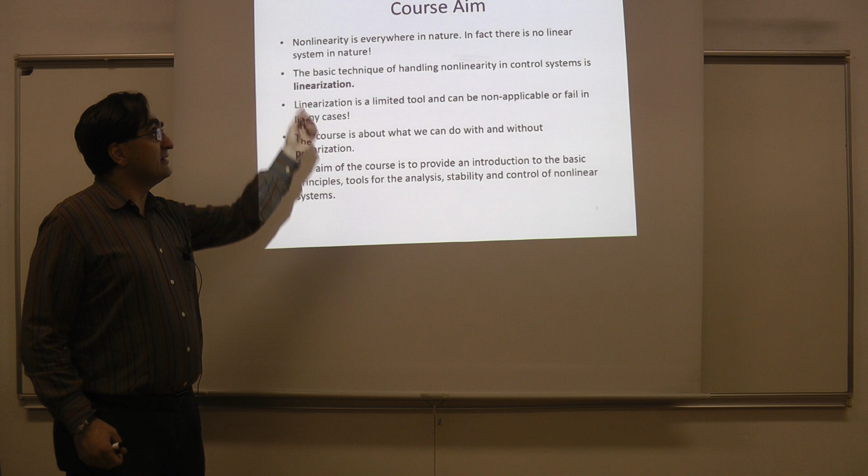So linearity is an idealization. It is not a natural phenomenon, actually, and you lose it quite easily by going outside the operating region of your components. So nonlinearity is the main thing that we observe in nature, not linearity. Linearity is only constrained to a small region. So there are no linear systems in nature. All systems are nonlinear, and that is why studying nonlinear systems is important for a person working on control theory.

So when you try to apply your linear control tools, you have to be aware of this fact. If your system gets outside the region of linearity, then you are no longer controlling a linear system, you're controlling a nonlinear system. And you have to be aware of the effects of nonlinearity, what it can cause, what the consequences would be, and what solutions have been developed to fight nonlinearity.

So the first tool that we use in control to beat nonlinearity is to use linearization. If you have a nonlinear system, suppose you constrain yourself to a small operating region, and you would like to apply PID control on that system. We know that nonlinear systems would not behave well under Laplace transformation, so in order to get transfer functions, you need a linear system. When you have an actually nonlinear system in your hand, what you have to do first is apply a form of linearization to that system.

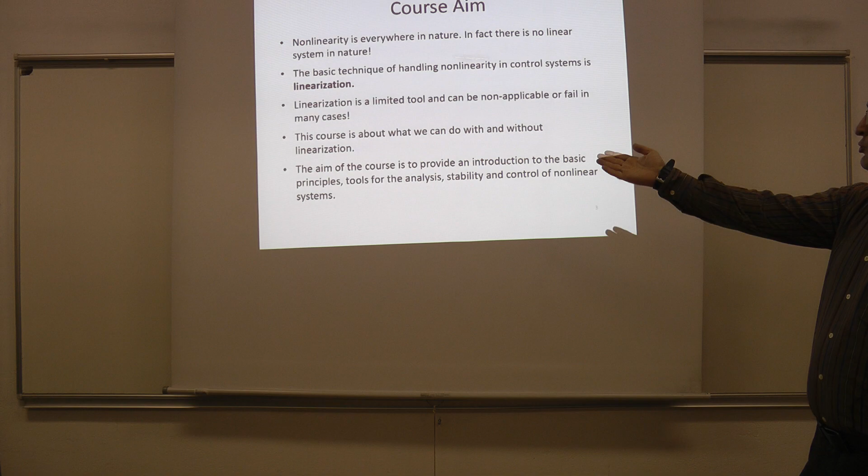So this course, EE404, is going to be about what we can do with and without linearization. The aim is to provide an introduction to the basic principles and tools for analysis, stability, and control of nonlinear systems.

This is my course conduct for this semester, and that is the main textbook that I'm going to try to follow. Nonlinear control is a very advanced topic. In this department, there is also a graduate course which is much more advanced than EE404. In the undergraduate courses, we try to keep the level of mathematics quite low, even though that may still be advanced for some students, but we try to keep it under control.

In the graduate level, the mathematics is much more difficult, and it would be a really challenging topic. There are many nonlinear control books, and most of them are not readable for an undergraduate student. This is one of the readable books, and you might enjoy reading the chapters about the topics we are going to cover.

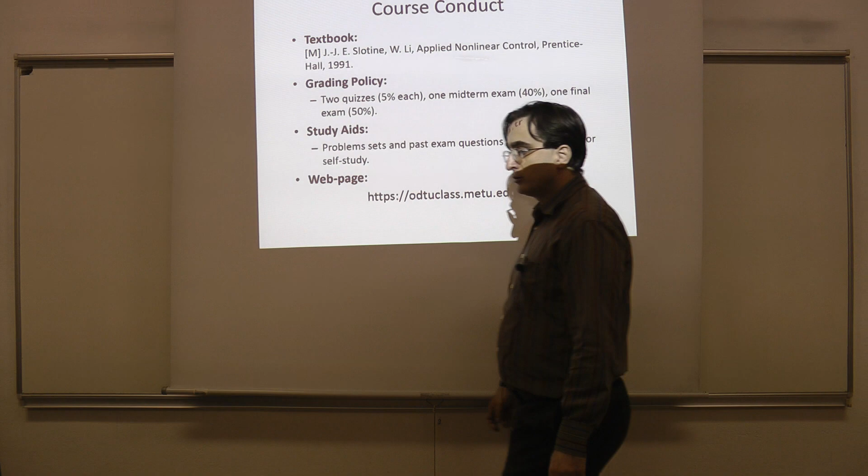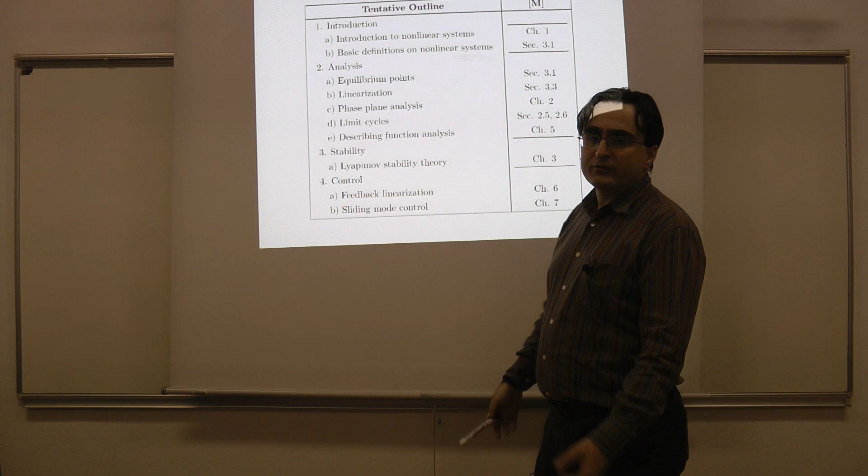This is a tentative outline. The course is more or less composed of three main parts. We are here now, at the Introduction to Nonlinear Systems, but the three main parts are analysis, stability, and control. In the analysis part, we are going to be given some nonlinear systems and try to analyze their properties, how they behave. In this part, we will see many properties of nonlinear systems and try to obtain the tools we can use to analyze them.

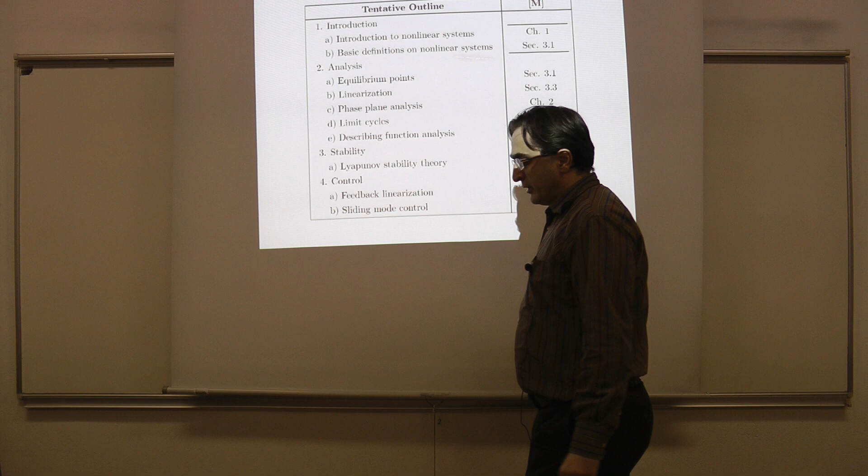The second part is about stability. Almost any course in control systems should contain a part on stability, and analyzing nonlinear stability is much more difficult than analyzing linear system stability. In linear system stability, we just look at the poles, whether they are in the left half plane, the right half plane, or on the imaginary axis. Since for nonlinear systems the Laplace transform is useless, we won't have a concept of a pole or zero. As a result, investigating the stability of nonlinear systems in general is much more difficult than investigating stability for linear systems.

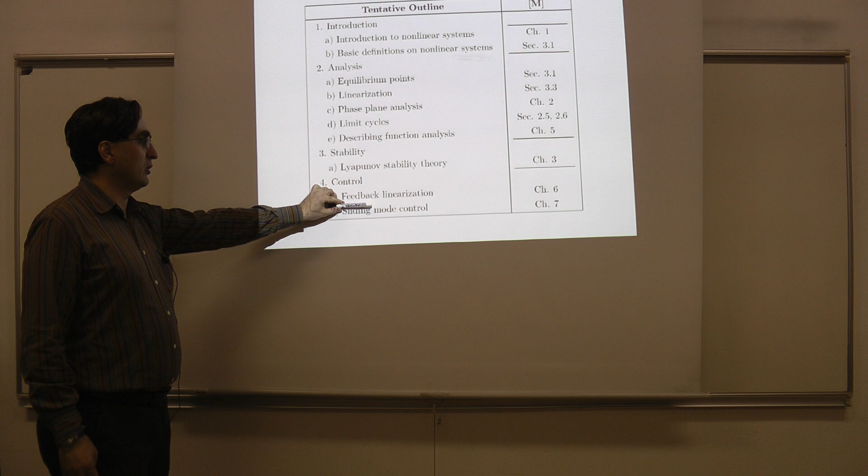The last part is going to be the control of nonlinear systems, and in that part there are two methods. So far, when I've tried to teach this course, I could only come until this point. I always covered feedback linearization, but there was no time for sliding mode control. We will see if time permits.

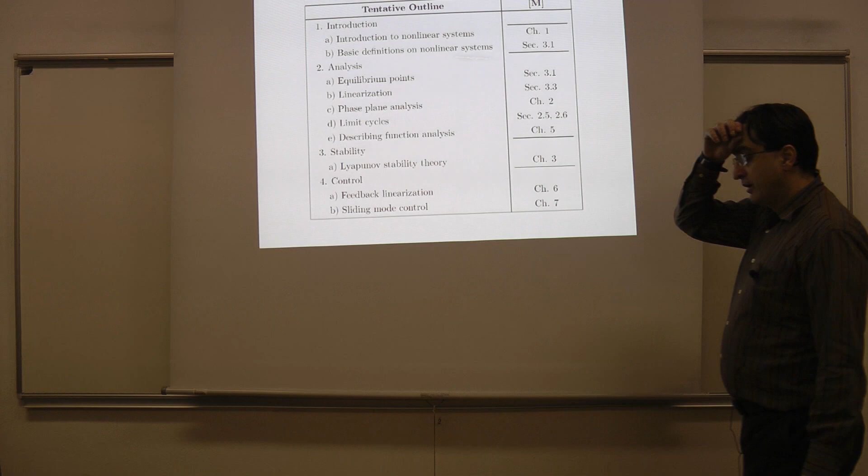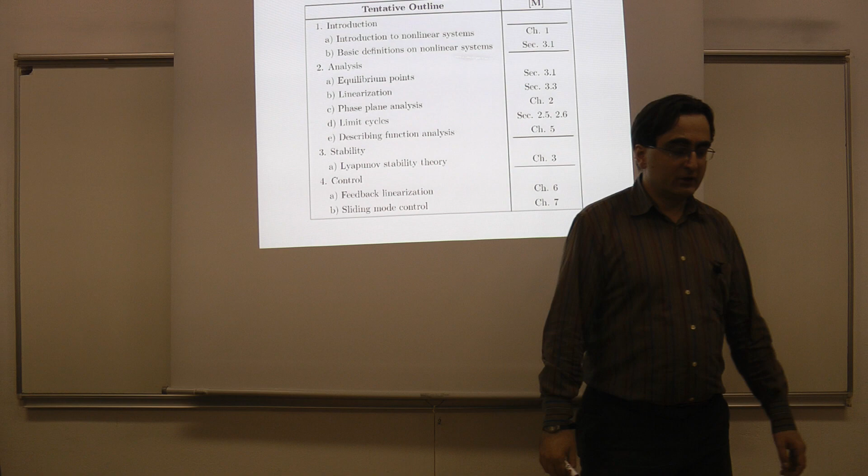The last time I gave this course, COVID-19 hit the world, and in the second half the course was given online. So I already have some lectures for the second half of this course from this point on. Now I'm going to cover the first half using new videos, and then I will give the second half using last year's videos. Unfortunately, last year's videos were a little more primitive - we didn't have this board option, so I just prepared some lecture notes and spoke in a video to explain those notes. So the second half's format is going to be different from the first half's format.

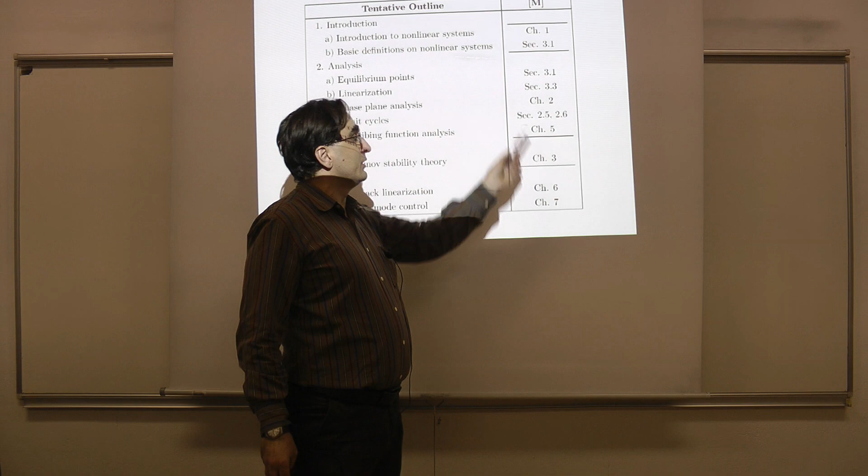So that was the outline, and here are the chapter or section numbers in the book that cover the related topics.

So now let us look at why linear systems are not sufficient. Most of control theory is related to linear systems. For example, the PID controller is a linear controller, and we usually design PID controllers for linear systems as well.

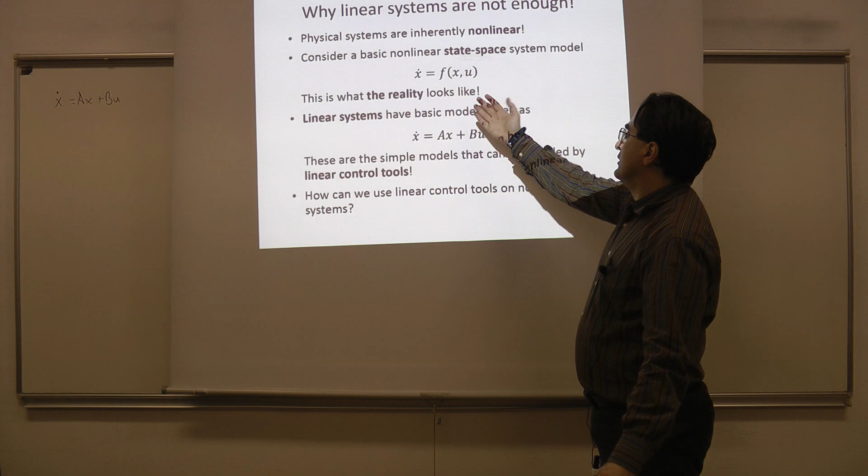A linear system in state space form would look like this: x dot is equal to Ax plus Bu. On the other hand, as I told you, there are no linear systems in nature. Therefore, nature looks like this: x dot is equal to...

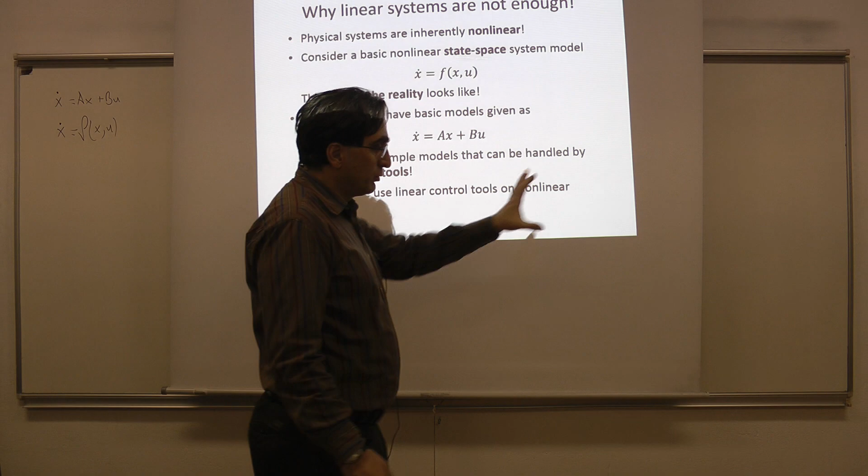I might guess that in this video you might be having some difficulty seeing the board, because of these bright slides. When I turn the projector off, in the actual lectures you'll be able to see the board much more clearly. Don't worry about it. In this lecture it's not too critical that you see the board, so try to manage just for this lecture.

So this is what we know how to control. We know everything about linear systems, but since reality is not represented by a linear system, we usually don't know how to control this system.

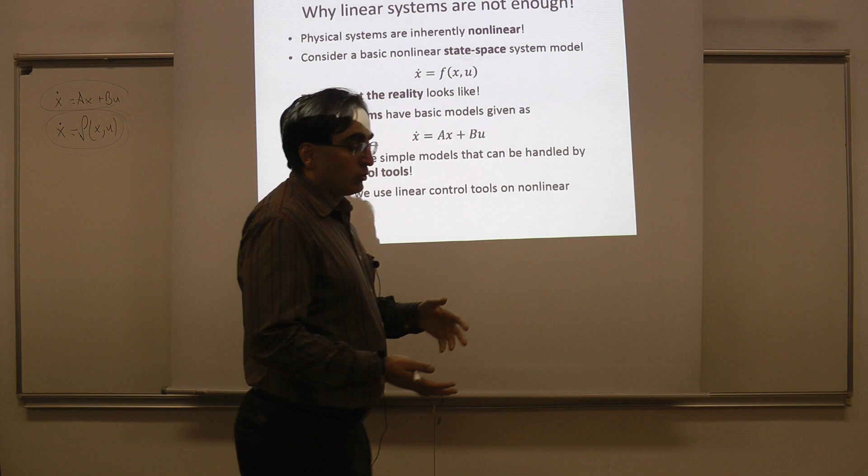So the first thing we try to do is actually convert such a nonlinear system into a linear system. Almost all of our control tools are developed for linear systems, so we have a toolbox that is useful only for linear systems. Since reality is like this, the first thing we try to do is use our already developed toolbox.

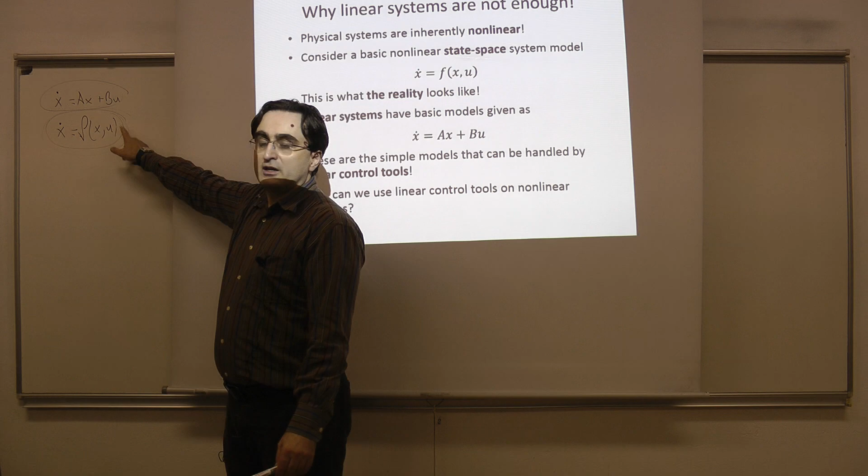We try to convert this nonlinear system into a linear one first. That is the first thing that we try, and that is called...

linearization of a system. Suppose that this nonlinear function f looks like this: a nonlinear function of x plus a linear function of the input. Of course it can be a nonlinear function of both state and input, but we'll see that case later. In this presentation we have just a simple linearity for the input and a simple nonlinearity for the state here. So this function is still a nonlinear function because of this f of x.

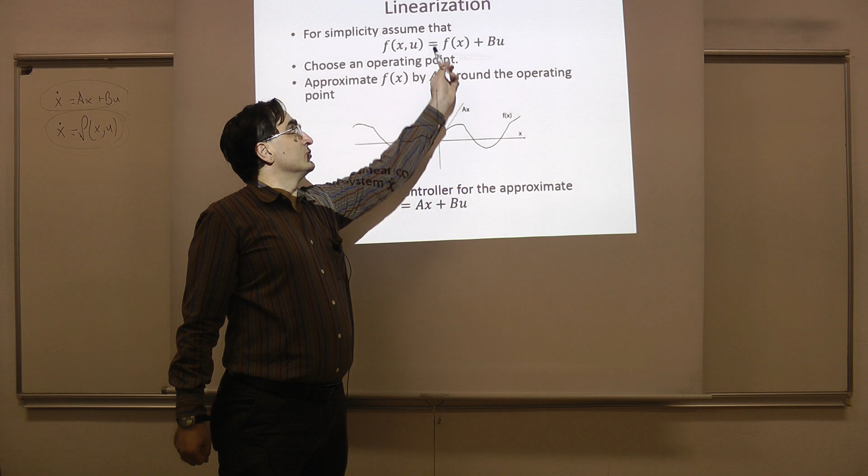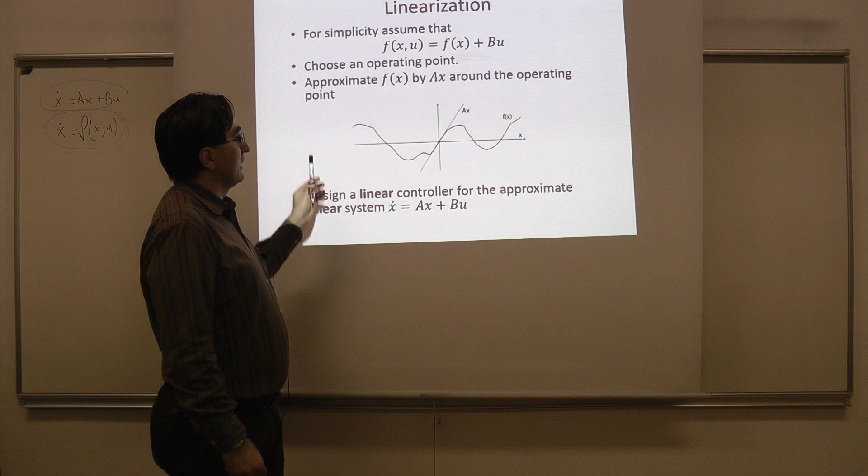Suppose this f of x looks like this. x is a scalar, and f of x looks like this: it's a nonlinear function, it doesn't look like a line anymore. So the first thing we apply to control such a system is linearization.

So we choose an operating point. This operating point was chosen as 0 here, the origin, and then we try to approximate that nonlinear function in an operating region just with a line. We represent the nonlinearity around an operating point just using a line segment. We're going to see the tool we use for this.

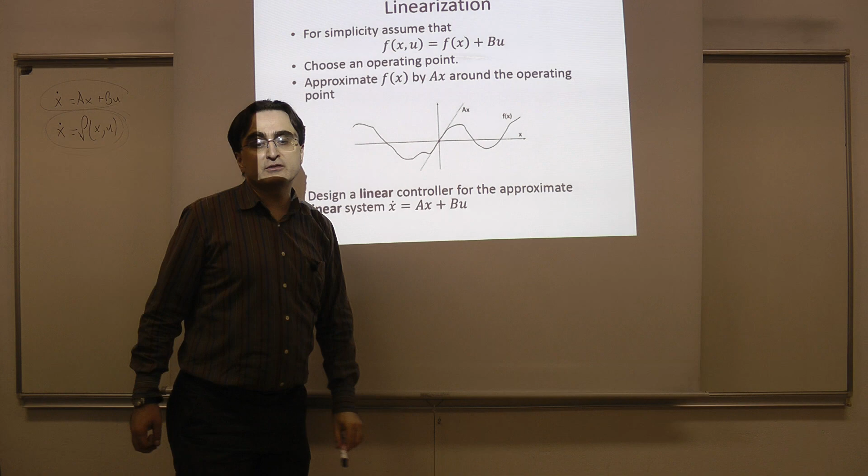It's just called a Taylor series expansion of this function f of x around operating point 0 here. Then what we do is replace this nonlinearity with this approximating line, which gives us a linear system that we can use to apply our linear control tools.

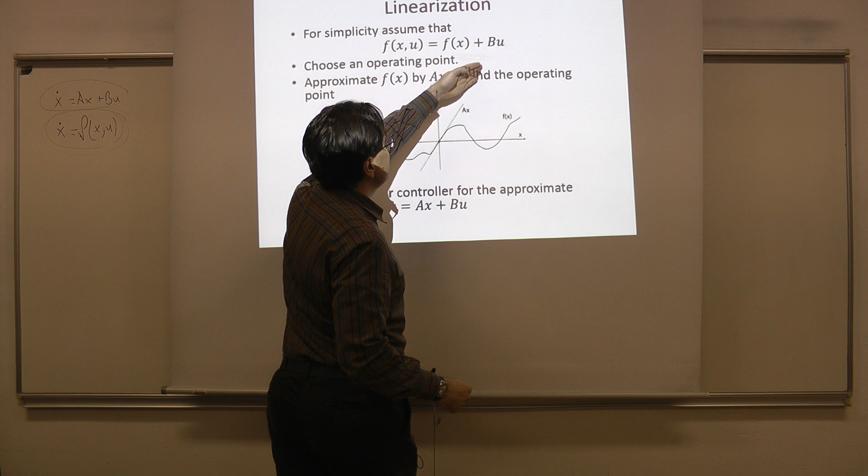But as soon as you look at this picture here, the function f and the approximating linear function, you can see the limitations of linearization. If the system we want to control remains in this small operating region, then the approximation of f with this line is quite accurate in that region. But if my system has a larger operating region, if x can go far in either direction, then this simple line really cannot represent the nonlinearity anymore when we're far from the actual operating point.

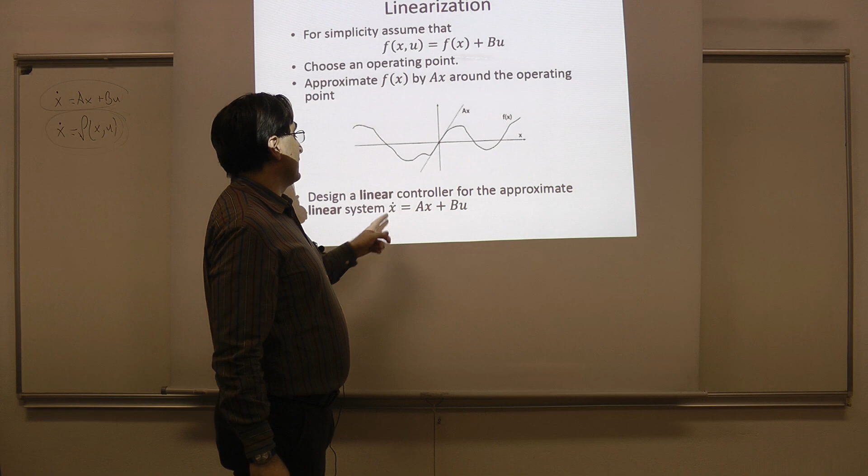So linearization is a limited tool if you want your system to have a very large operating region. Linearization is only valid in a small operating region, and if you go outside it, you get very wrong results. In that case, the linear system would no longer approximate the actual nonlinear system, and your controller would be faulty because it's based on this wrong linear system.

Then you're going to lose your performance, and even sometimes you might get unstable closed loop systems at the end. So then what can we do?

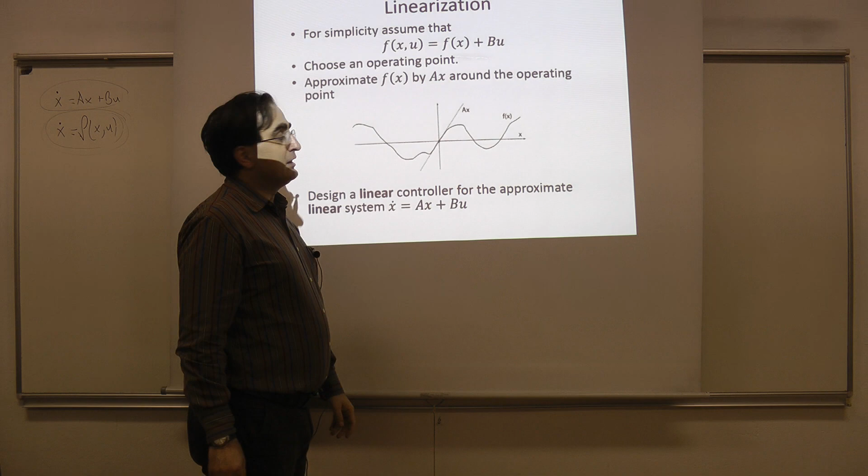So the solution that is proposed for such cases, if you would like to run your control system in a very large operating region, is to apply multiple linearizations at the same time. At this operating point, we obtain this linear system. At this operating point, this linear system. At this operating point, we apply another linearization. At this point, we apply another linearization, etc.

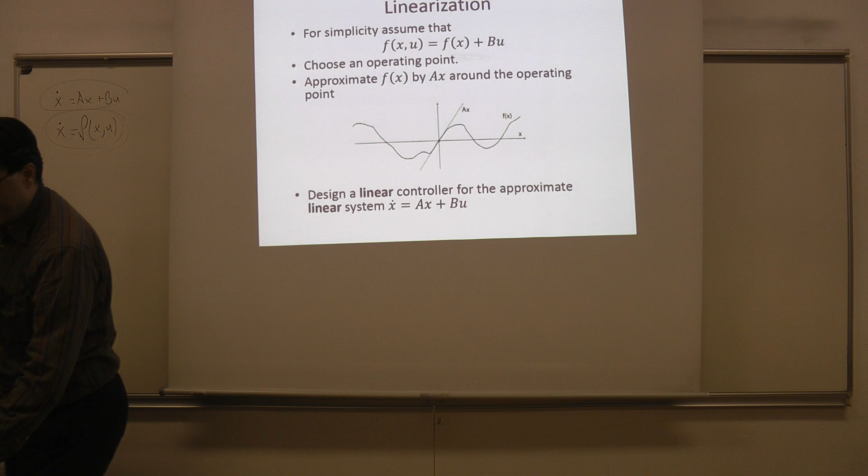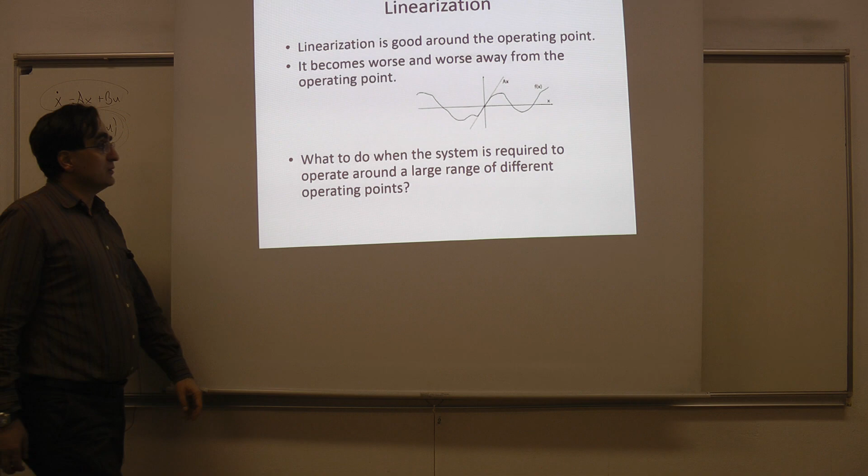So this is what I already talked about. Linearization is very bad when we go away from the operating point. If we are close to the operating point, linearization is fine, it's a good approximation. But if we are too far away from the actual operating point, then the linearization will be very bad.

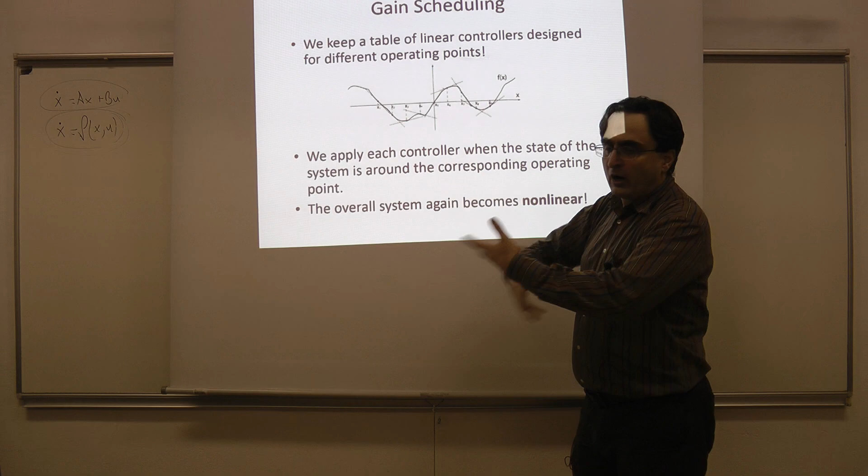So in that case, we actually linearize the system at multiple operating points. At each operating point, we apply a linearization, and then we switch. So for each of these lines, we have a different linear system. Each of these lines gives us a different linear system, and for each of those linear systems, we design a controller, and then we switch our controller by looking at the operating point of the actual nonlinear system.

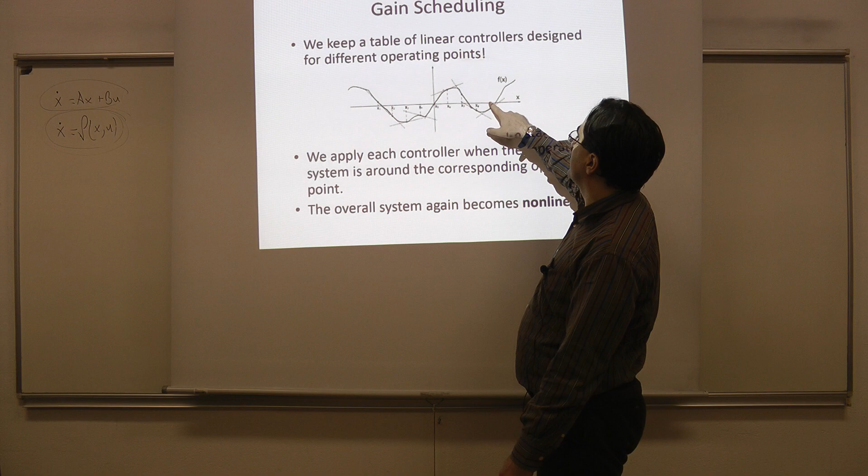If the system is operating close to this operating point, we use the controller designed for the original approximating linear system. On the other hand, if our operating point comes close to here, we would use the controller designed for this linear system here. So we switch our controller depending on the operating point of our system.

And this idea is called gain scheduling. So we schedule our gain, which means more or less a controller, and we schedule our controller depending on where the current operating point of the system is.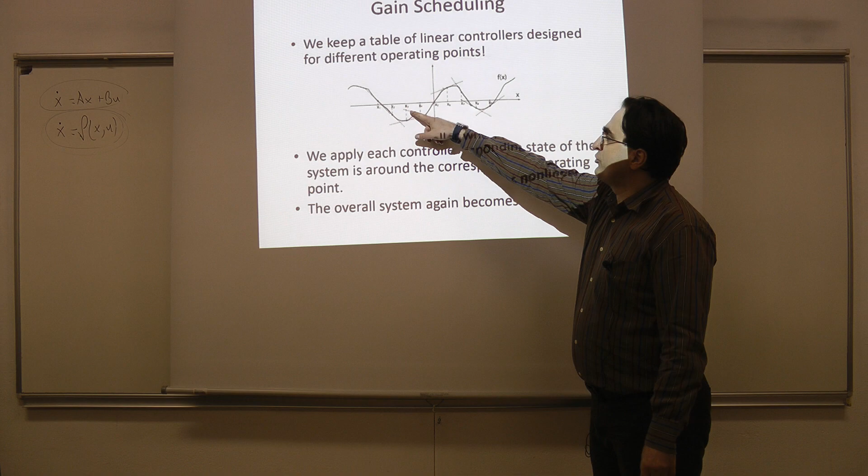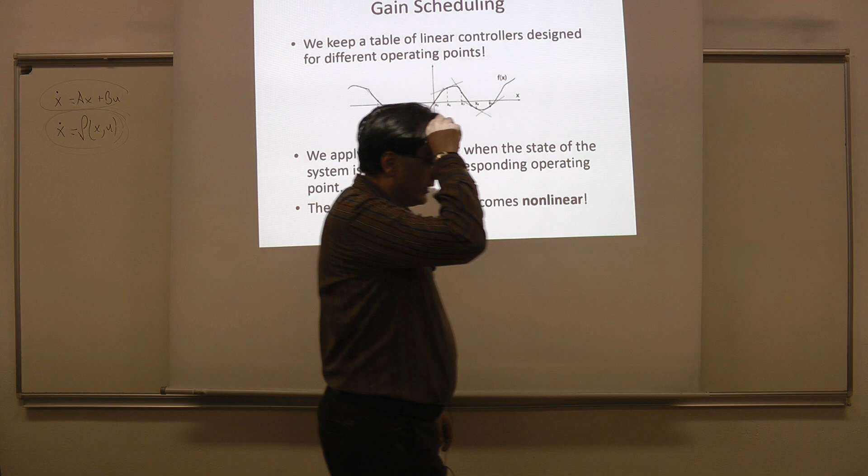So this is one of the basic ideas of nonlinear control, but still this function represented by these lines here is still a nonlinear function, and the overall system, your controller, would still be a nonlinear system, and you would still need some nonlinear system analysis tools in order to investigate the behavior of such systems. So there is no escape from nonlinearity if you want to deal with a nonlinear system in a large operating range.

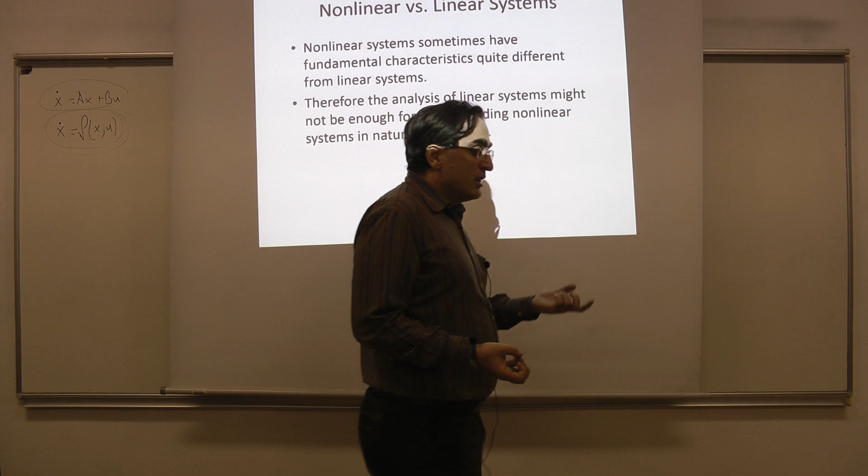So now, if the behavior of a nonlinear system is actually close to the behavior of a linear system, then we might not have a problem. But this is usually not the case. Nonlinear systems are usually not very similar to linear systems in behavior, and they have some distinctive behavior that is not observed in linear systems.

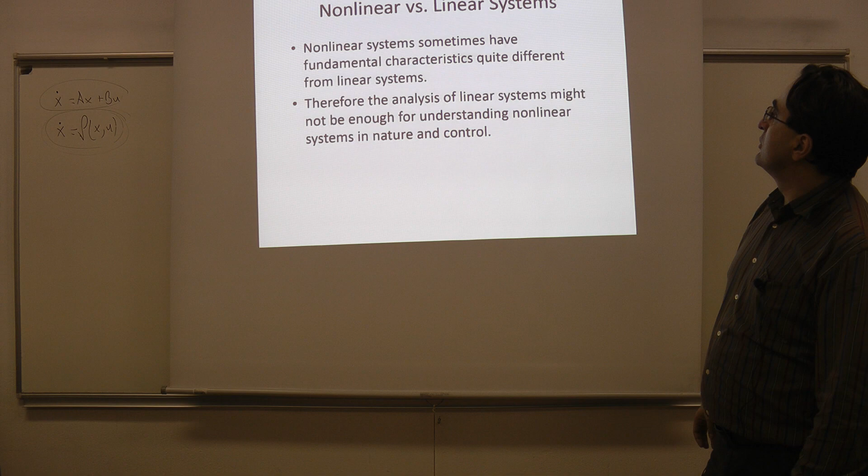So now let us try to look at that behavior. I'm comparing nonlinear systems and linear systems, and I would like to tell you about what behavior a nonlinear system can have that is different from a linear system.

So the first thing that you notice when you try to work with a nonlinear system is that the scaling property does not hold. Remember, at the beginning of the course we saw the definition of linearity. One of the properties of a system that must be satisfied for it to be linear is the scaling property. You probably remember this.

When I give the system an input, you get an output. For a linear system, an input gives you an output. Suppose that I scale that input with the constant 2, I multiply the input by 2. Then what happens in a linear system, if the system has zero initial conditions, is that the output is multiplied by 2 as well. So when I scale the input with a constant, a linear system gives me the scaled output, the scaled version of the output observed in the first case.

But for nonlinear systems, this does not hold anymore. So when you scale the input, the output might be scaled with another constant, or something even stranger might happen. Here I'm showing this behavior on a very simple system.

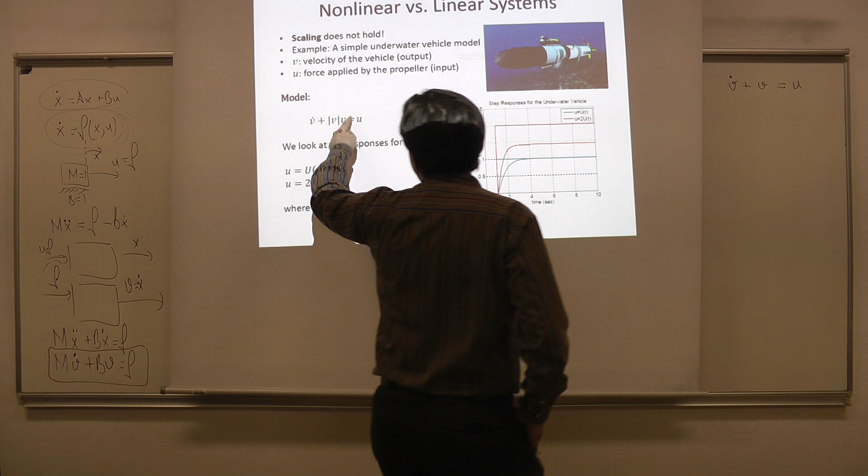Now the system that we are going to see for the underwater vehicle is not a linear system because of this second term. I have here V dot plus absolute value of V times V. So in this case, this is not linear because of this second term. In the linear system, I had only V here, but in that case, I would have a nonlinear function of V.

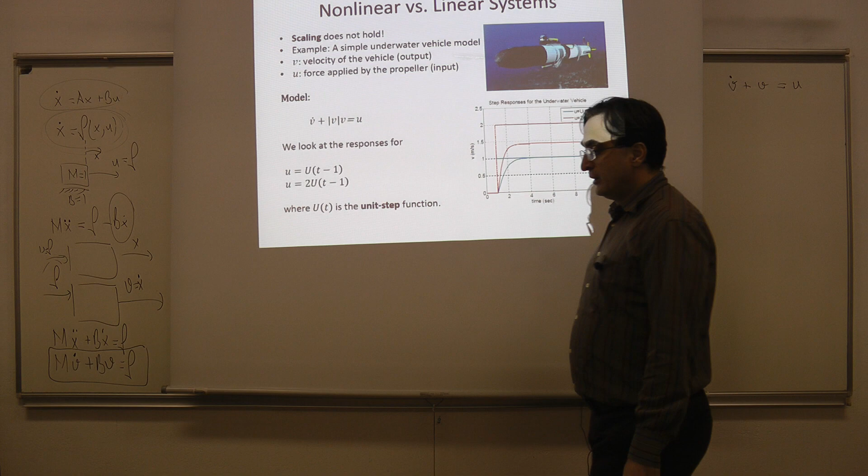So here, why does that nonlinearity come in? In underwater or in air, the friction would usually be proportional to the square of the velocity. But in the linear system, this friction force, B times x dot, or B times V here, used in deriving this equation, took the friction force proportional to the velocity. That is a linear friction model, and it's a restrictive friction model. In reality, in a fluid, the friction would be proportional to the square of the velocity.

What does it mean? When you double your velocity, the friction force applied onto you would be quadrupled. So it is not really very good, and the friction in fluids is usually called drag. In this case, we replace this friction term like this: we take V dot plus absolute value of V times V is equal to U.

So this is a nonlinearity in this system, and as soon as I include that nonlinearity, the scaling property starts to not hold anymore. Why does it not hold? Suppose I look at this system: when I double the input of the system, V and V dot are also doubled, and for the linear system, the output becomes twice the original output.

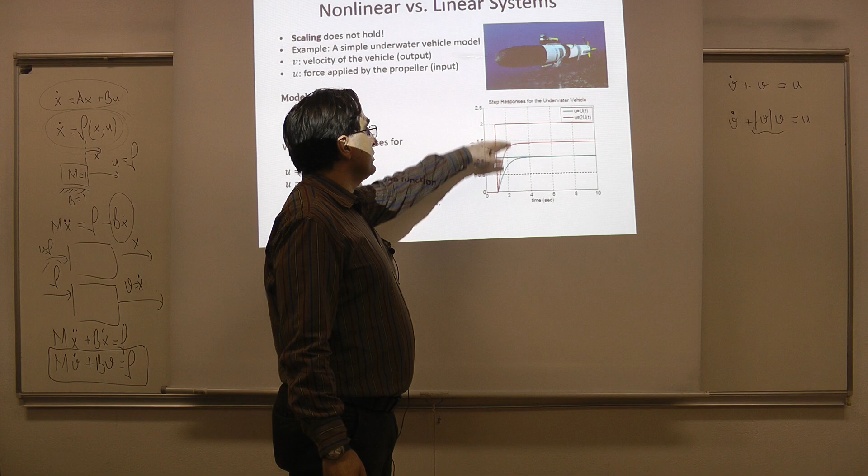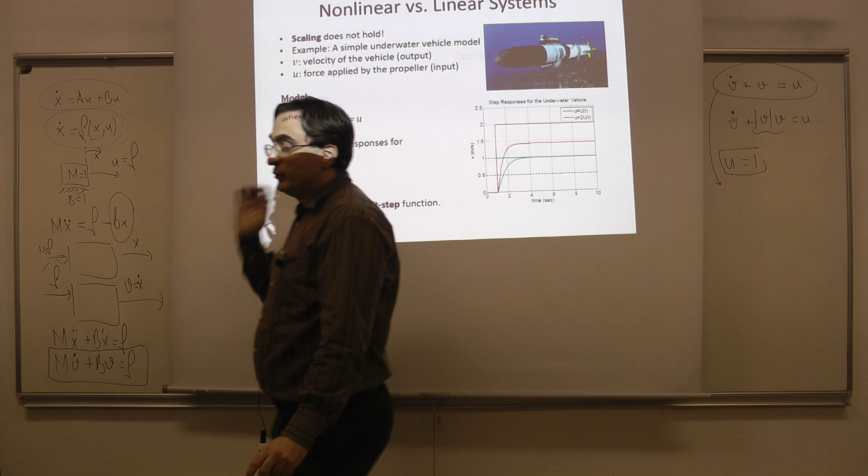So here, I'm giving the system a step input and looking at the outputs. Suppose that we look at only the steady state values here. I'll take this linear system and suppose that I apply a constant input U equals to 1. What would be the final value of the output V here?

V dot plus V is equal to 1. This is the equation I have, and from it I can find the final value of the output. I am assuming the output settles at some point. If V settles, then V dot becomes 0, so V becomes equal to 1. For the linear system, if I give the constant input 1, I get the constant output V equals to 1. What happens when I give the system twice this input?

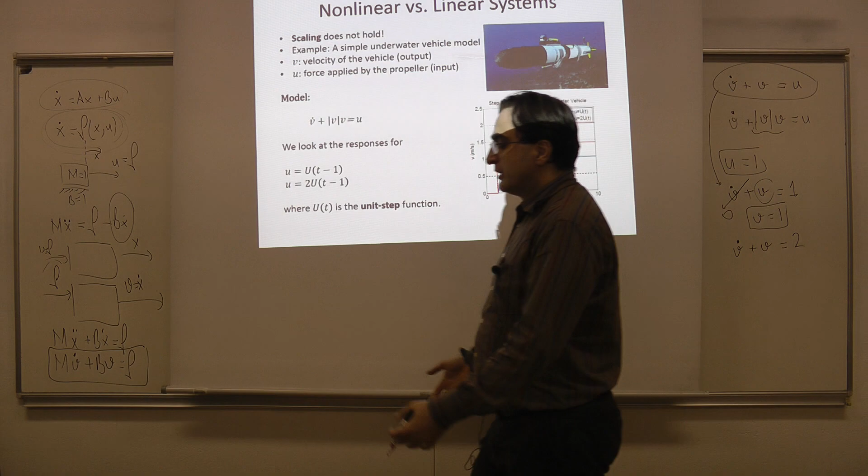Suppose that I want to find the final value of the differential equation V dot plus V equals 2. I increase the force that I apply onto the system, and what would be the final velocity that I get from the system? If I set V dot equal to 0, assuming that the velocity settles at some point, I see that V is equal to 2. Let me write V infinity here. So these are the final values of the velocity. So you see that for the linear system, when I double the input, the final output doubled as well.

Now I'm going to do the same thing for the nonlinear system. Let us see what is going to happen in that case.

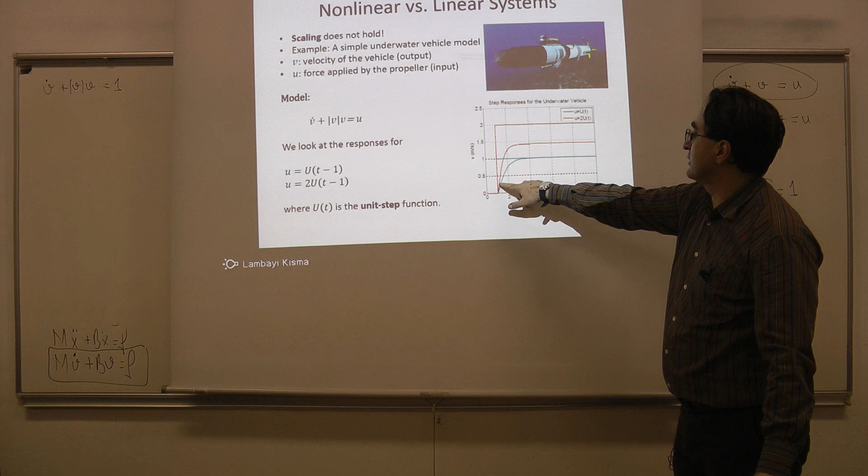For the nonlinear system, I have just this system: V dot plus absolute V times V is equal to 1. I apply the constant input, which is 1, to the nonlinear system, and the output comes to here, somewhere like this. This curve represents the output of the system. Now, what is the final value of V infinity in this case? I know that if the output settles at some point, V dot is going to be equal to 0 at that point. So V infinity times V infinity is going to be equal to 1, which tells me that V infinity should be 1.

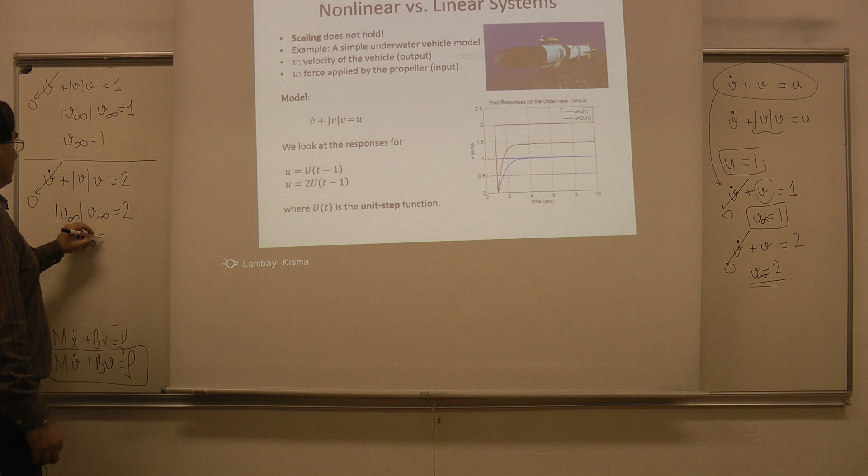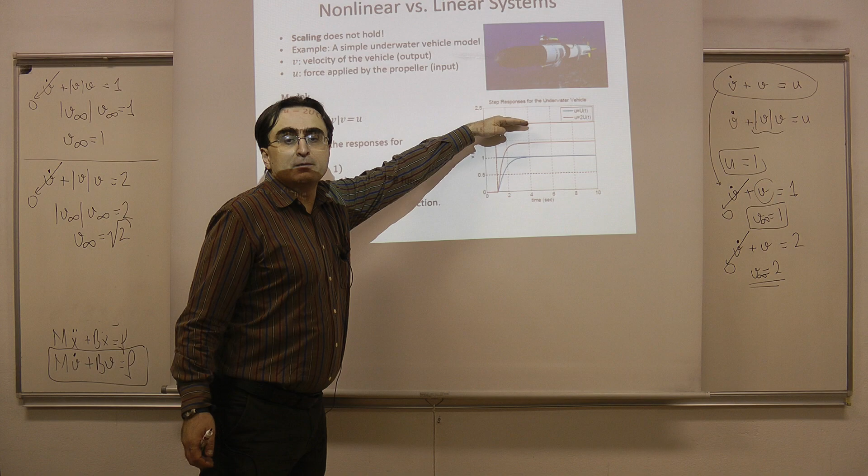Now let us scale the input of this nonlinear system. Suppose that I try to find the final value of the output for this differential equation. I scale the input by 2, taking twice the original input here. So now if the system settles, V dot is equal to 0, and V infinity times V infinity is equal to 2. Then what is V infinity? What is the final output? You see that it is going to be just square root of 2. So you see that the final output does not go to 2 anymore. It goes to the value square root of 2. So when I take twice the input, the output now settles at somewhere around square root of 2.

So definitely we don't have any scaling for nonlinear systems. Of course, some nonlinear systems might still keep that property, but I'm talking here about the general case. For the general case of nonlinear systems, scaling might not hold, which is a disturbing thing for us.

Now let us look at the case of stability. Suppose that I have a linear system looking like this: X dot is equal to AX. For such a system, the stability is dependent on the sign of A. Let us say I have BU here as well. What is the transfer function of such a system? Suppose that Y is equal to X. If you look at the transfer function of this system, you would see that it is going to be G of S equals B over S minus A. So this system is going to be just a first order linear system, and its stability is dependent on the pole position. The pole is at A.

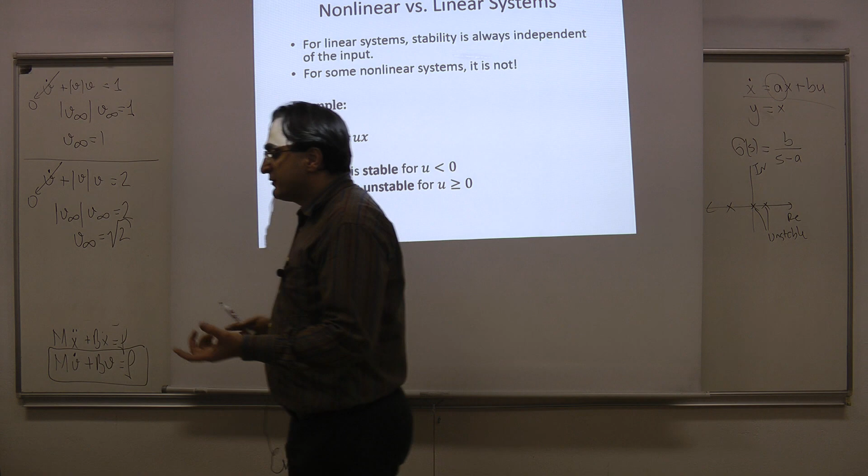But for nonlinear systems, unfortunately, the same thing cannot be said. Suppose that I consider a very simple nonlinear system: X dot is equal to U times X. U here is the input, and X is our state, and I consider Y equal to X here. Can I have such a system as a linear system? This U times X multiplication is a nonlinear effect. We see that in a linear system, the input and the state can never be multiplied, because multiplication is a nonlinear operation, and it would give us a nonlinear system at the end. So in this simple nonlinear system, we have the multiplication of the input and the state. We see directly that if U is positive, then this system would be unstable, X would go to infinity, and if U is negative, then the system would be stable.

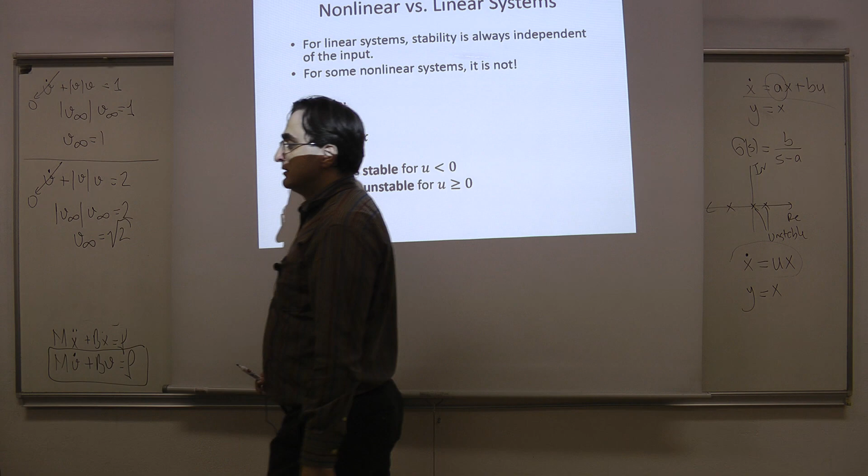So depending on the sign of the input, the stability of the nonlinear system can change. On the other hand, for a linear system, whatever the input is, stability is only determined by this coefficient here. Okay? On the other hand, for the nonlinear system, this coefficient can be the input. And in that case, the stability of the system would be dependent on the input for a nonlinear system. And this is really a very, very basic example of this phenomenon. So it is really disturbing for us.

In general, in a linear system, whatever the input is, if I'm working with simple systems, then if I'm working with a stable system and I give it a bounded input, I know that the output always would be bounded. Okay? So independent of the input sign, for example, I can be sure that my output will be bounded if I'm working with a linear system.

On the other hand, if I'm working with a nonlinear system, I need to be really, really careful about the inputs that I give to it. Okay? If I give it a wrong input, I might make a stable nonlinear system an unstable nonlinear system, and it would be really catastrophic at the end. Okay? That is a very distinctive property of nonlinear systems that is not observed for linear systems.

So another distinctive characteristic of a nonlinear system is related to oscillations that we can have. Okay? So suppose that I have a linear oscillatory system. You might remember this system. So I have just a simple harmonic system here. So just some spring effect and just some M here, the mass, and suppose that there is no friction. Okay, so this is the initial point, x equals to 0. That is the equilibrium point of this linear system. All right.

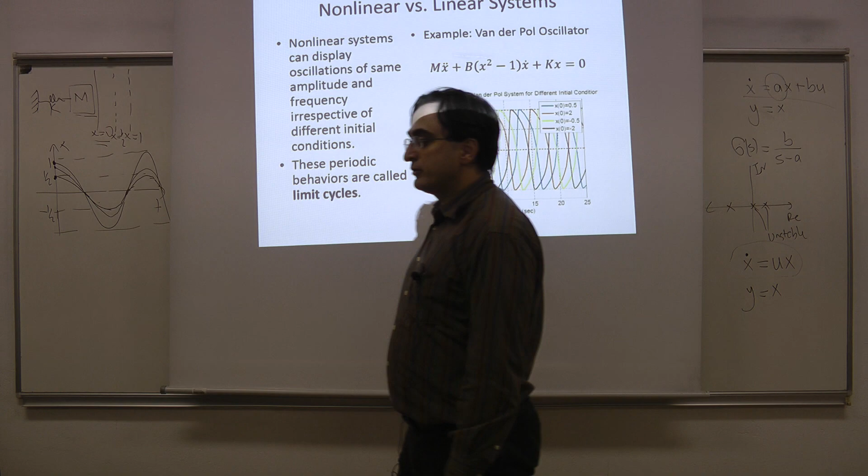Sometimes for a nonlinear system, this really doesn't happen. Okay? For a nonlinear system, sometimes even when we scale the initial condition, the resulting oscillation amplitude would always be the same at the end. So for some nonlinear systems, we can never scale the amplitude of the oscillations, however much we play with the initial conditions. For any initial condition, sometimes a nonlinear system would always converge to a single amplitude oscillation.

This is an example. Here, different colors represent different initial conditions, but you see that even though I scale these initial conditions, at the end the system would always reach the same oscillatory amplitude. It is this system that is given here. It's a nonlinear oscillatory system, and such a system, whatever you choose as its initial condition, would always converge to an oscillatory behavior with the same amplitude, two here. Okay?

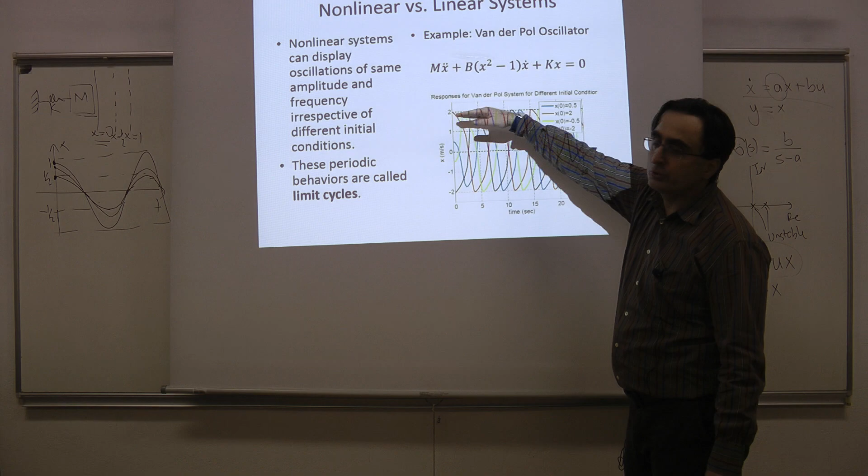These types of oscillations, whose amplitude and frequency do not change by changing the initial conditions, are only observed for nonlinear systems. And these types of oscillations have a specific name in the control literature. They are called limit cycles. We are going to spend some time in EE404 on the prediction of the existence or non-existence of limit cycles for nonlinear systems. Sometimes this type of behavior would be good, sometimes it would be really, really bad.

Okay? So suppose that you want to avoid these oscillations. In a linear system, you can do it by scaling the initial condition. Just choose a very small initial condition, and then the oscillation will be very, very small. In this nonlinear system, if you try to do it, you will not be successful at all. Even if you take a smaller initial condition, your oscillations will again grow to the same amplitude. So if you want to avoid oscillations, working with nonlinear systems is worse.

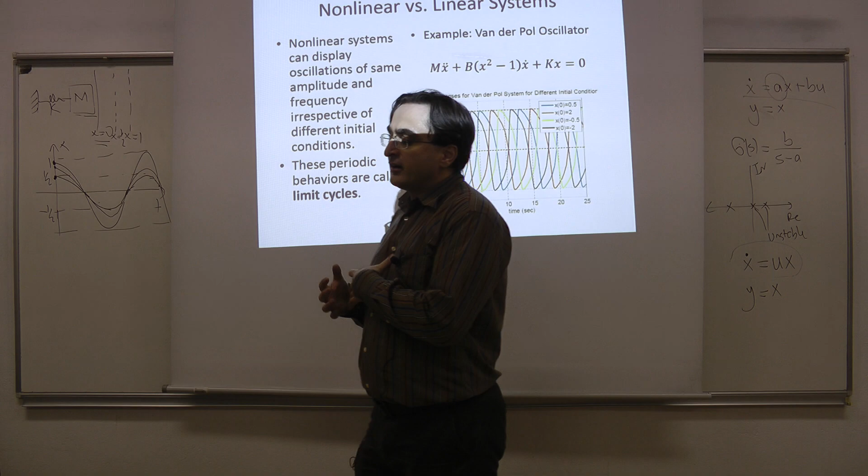On the other hand, sometimes oscillations are desirable. Sometimes we want oscillations in the system. What can be the examples? We really want oscillations in biological systems, for example. Our heart is just an oscillator. It is a simple biological oscillator, and we want it to oscillate forever. We are usually unsuccessful in that, but in that case, oscillations are desirable. Or our lungs, we always need to breathe. Breathing is again an oscillatory biological behavior, and we want that oscillation to continue indefinitely.

So oscillations are sometimes desirable. If you want to make a signal generator in a laboratory, to create a sine signal so that you can work with electronic components, you want that signal generator to oscillate. Or in the clock of a computer, you want that clock to oscillate, and you want to adjust its frequency quite easily. And furthermore, you want that oscillation to be robust to external effects.

Or in a radar system, you need to have a clock, because in a radar you are sending an electromagnetic wave and then recording the time instant that it arrives back to your receiver. You need to know the exact time that it arrives at the receiver, because from that time you get the range of the airplane that the electromagnetic wave reflected from. So you want your oscillators to be accurate, and you want them to be robust against external disturbances.

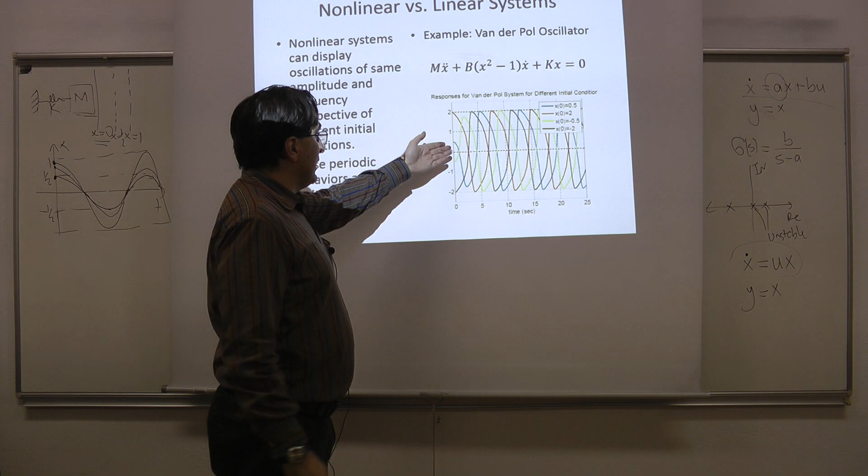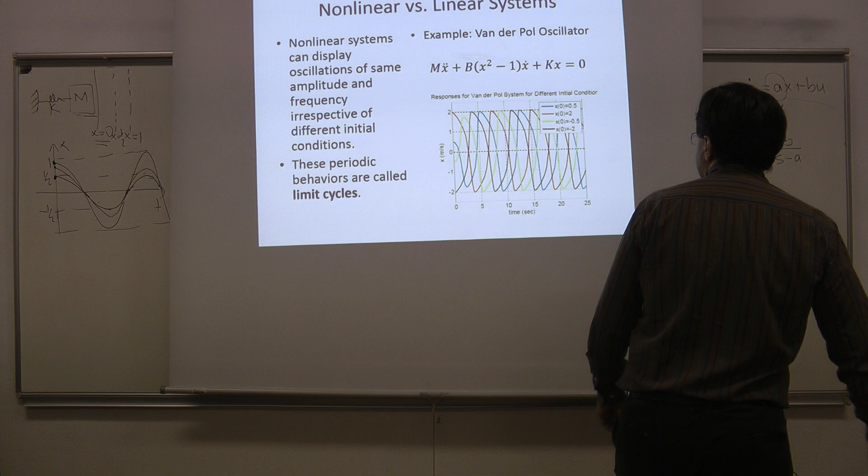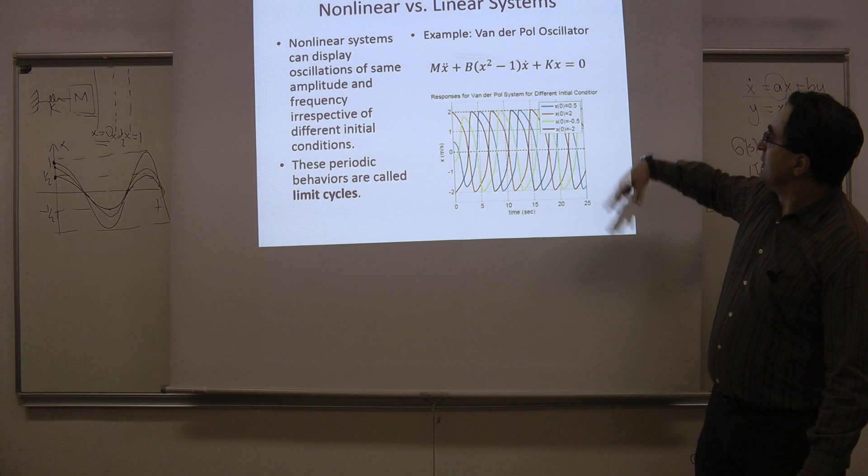And a disturbance for a system might be the initial condition. A linear system is not really robust to the disturbance of initial conditions, because if you accidentally give it a wrong initial condition, the oscillation amplitude would be quite sensitive to it. On the other hand, a nonlinear system can be very useful in terms of robustness, because whatever initial condition you choose, this system would always keep the same oscillation amplitude and frequency. So when oscillations are desirable, you want to work with nonlinear systems, for robustness and insensitivity.

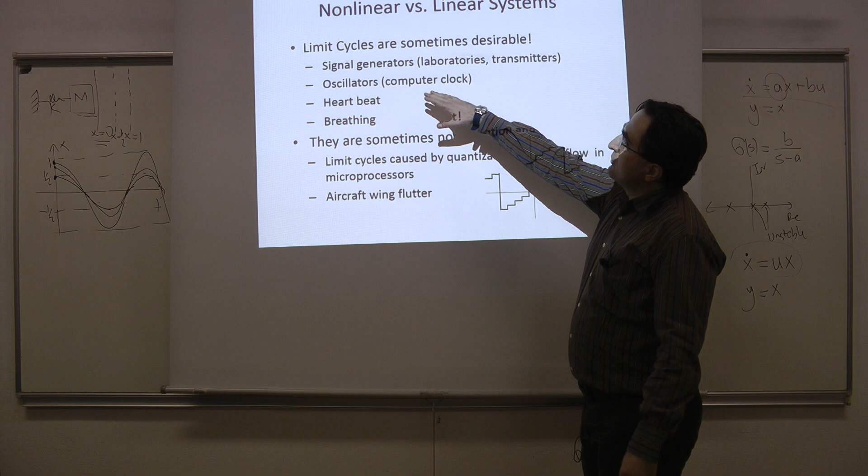So these are the things that I already talked about. You want oscillations in signal generators, oscillators in a radar or a computer, heartbeat, breathing. These are the cases when limit cycles are desirable, and these are the cases when they might not be desirable. When they are not desirable, working with nonlinear systems is really difficult, but when they are desirable, you need to work with nonlinear systems so that your oscillations have good quality or robustness.

Another behavior of a nonlinear system that differs from linear systems is their sensitivity to initial conditions. I have already shown you this type of sensitivity. Linear systems, of course, are also sensitive to changes in their initial conditions, but this sensitivity is not really much for linear systems. I am going to try to explain this just a little bit.

Suppose that I choose an initial condition for a linear system, the simple harmonic oscillator given like this. Suppose my initial condition is x(0) equal to 1 and x dot(0) equal to 0. So initially at rest and at distance 1 from the equilibrium. I have already drawn the response in that case. This is t, this is x, and the response is a constant amplitude and frequency sinusoid. So these points are equal.

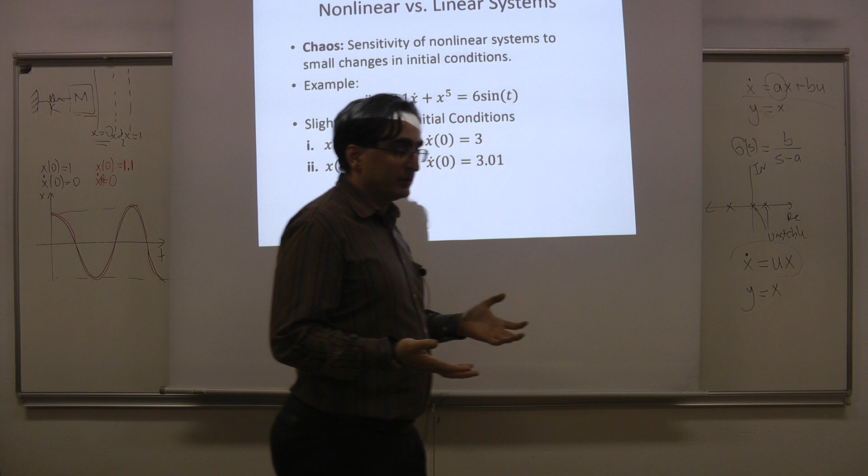So here, for linear systems, the behavior is very, very predictable. When I change the initial conditions very little, then the response changes very little from the original response. For nonlinear systems, this is unfortunately not the case, especially for some nonlinear systems. Some nonlinear systems are extremely sensitive to their initial conditions. And this type of nonlinear systems are called chaotic systems.

So if you have heard about the name chaos theory, this is specifically related to the sensitivity of nonlinear systems to their initial conditions. Sensitivity of nonlinear systems to small changes in the initial conditions is called the behavior of chaos, and it is only observed in nonlinear systems. Linear systems are not really sensitive to changes in the initial conditions. If I change the initial conditions very little in a linear system, the response changes quite slightly. But for a nonlinear system, this might not happen.

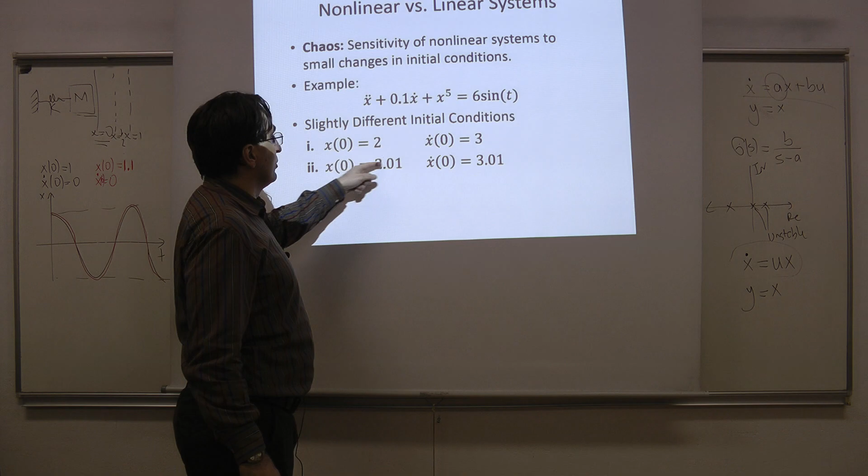So this is a nonlinear system, and its nonlinearity is here. I have x to the power 5 here, and that is what is causing the nonlinearity. Suppose that I consider two initial conditions for the second order nonlinear differential equation. The first initial condition is x(0) equals 2 and x dot(0) equals 3. The second initial condition is just slightly perturbed values for both. Then I can solve this differential equation for these two sets of initial conditions and look at the response.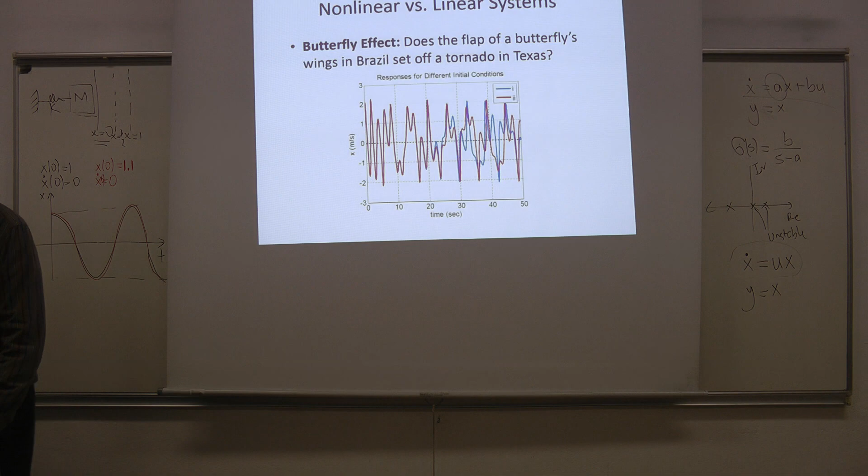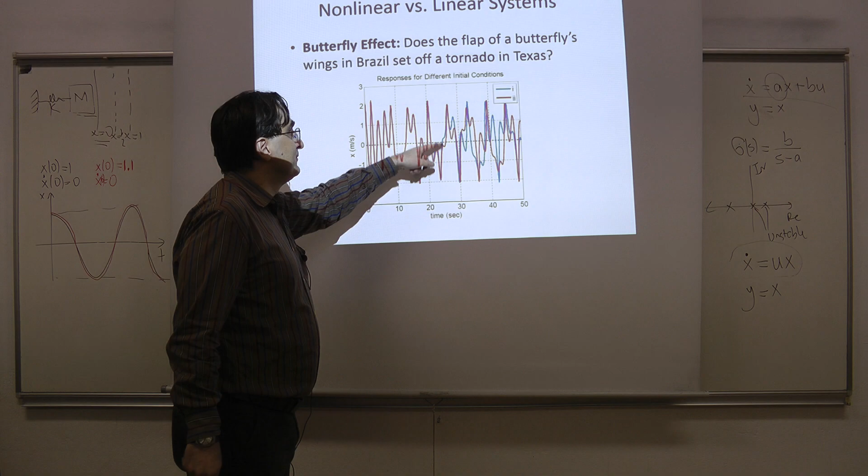So this is what you see for the responses. The blue curve is the response for the first set of initial conditions, and the red curve is the response for the second set of initial conditions. You see that they continue to be the same for some time. But when some time passes, they start to differ quite a lot. And at the end, after 30 or 40 seconds, they become completely different.

In a linear system, you never see such a behavior. This closeness would always continue forever, however long I run the system. But for a nonlinear system, for similar initial conditions, they might remain close, but after some time, everything becomes quite different in the response. This is called chaotic behavior, and sometimes this is named the butterfly effect. Small changes in the initial conditions would cause very large effects in the future.

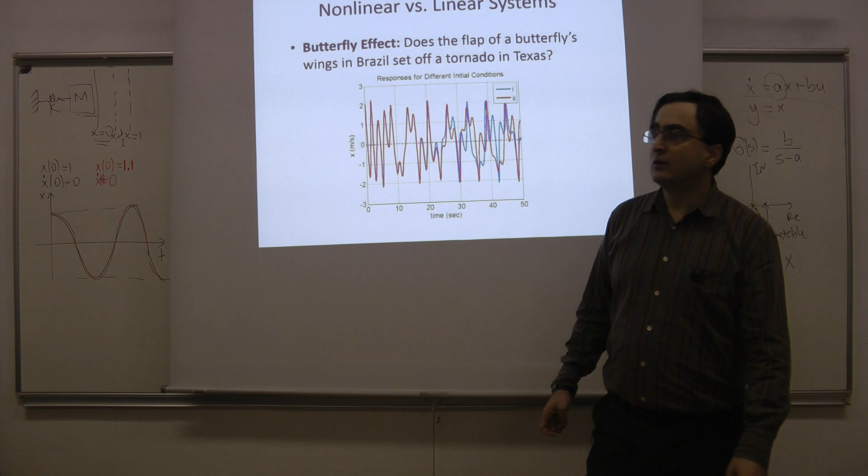So the original statement is, does the flap of a butterfly's wings in Brazil set off a tornado in Texas? Can a very small disturbance in the wind by the butterfly's wings cause a tornado? And this is really scary because chaotic systems are not just a mathematical curiosity. They are in nature, and they are actually everywhere. For example, turbulence in fluid mechanics, or atmospheric dynamics. The weather is a chaotic system actually.

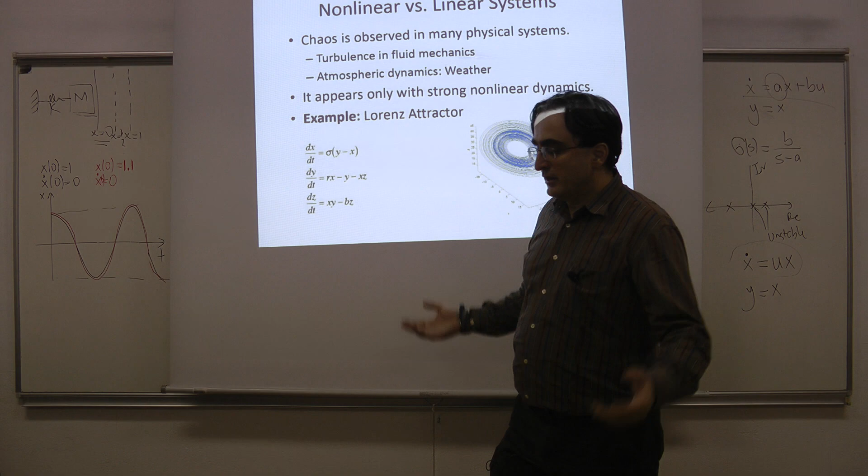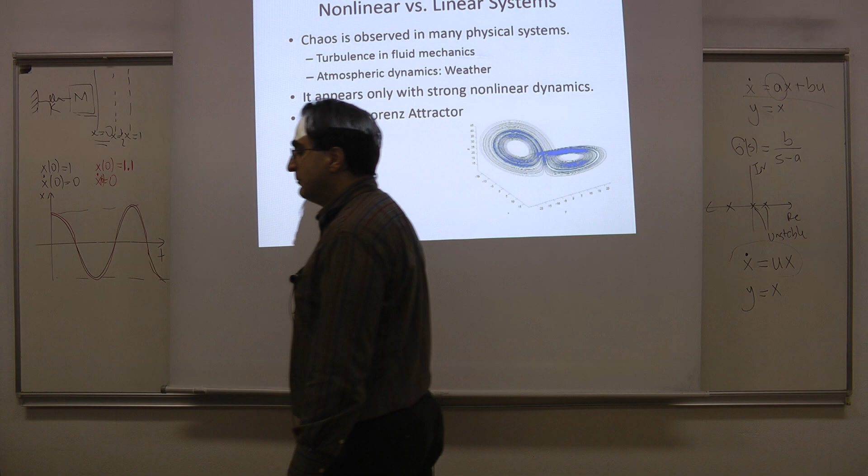That is why we cannot predict the weather very well. We can predict 15 days, 3 weeks, but we can never predict the weather next year at this time. That is because weather dynamics is a chaotic dynamic system, and in order to predict it, I need to know the initial conditions of that system very accurately. If I don't, the chaos effect is going to make my predictions extremely different from the actual weather dynamics.

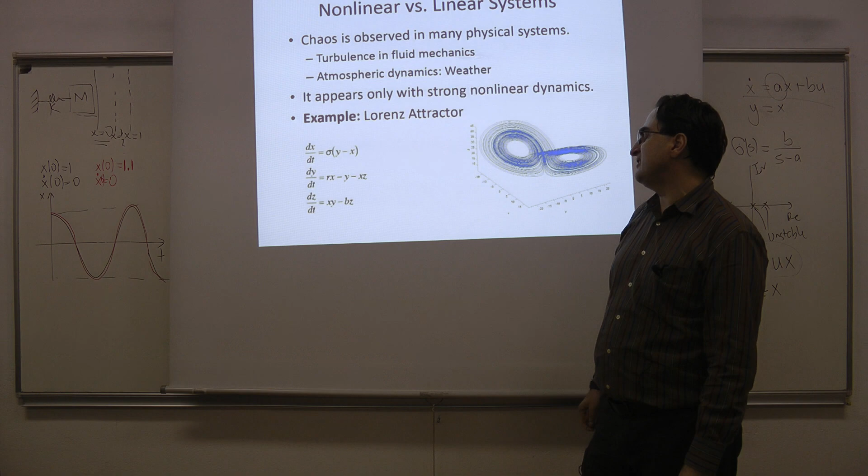So chaos theory was actually found by people working on meteorological systems. The first chaotic system was found by Lorenz at MIT, and it was a third-order differential equation given like this. Even in this simple system, you observe chaotic effects. This system is called the Lorenz attractor, and in its state space, you observe trajectories like a butterfly. It's an ironic thing.

When you look at the trajectories of such a system, you can never predict when it is going to pass from one wing to the other wing in the future. And if you look at the trajectories in 3 dimensions, you would see that it never passes a point in 3D space once it crosses it. This is not really very important for EE404, but it's extremely interesting for me.

So the last thing I'm going to talk about is who should take this course. EE404 is a nonlinear control course, and it's going to contain a lot of mathematics. So if you don't like mathematics, if you're a more physics-oriented person, you might not really like it. I'm warning you about this. My physics is not really that good, so I won't go into physical interpretations a lot. I really like working in the mathematical domain.

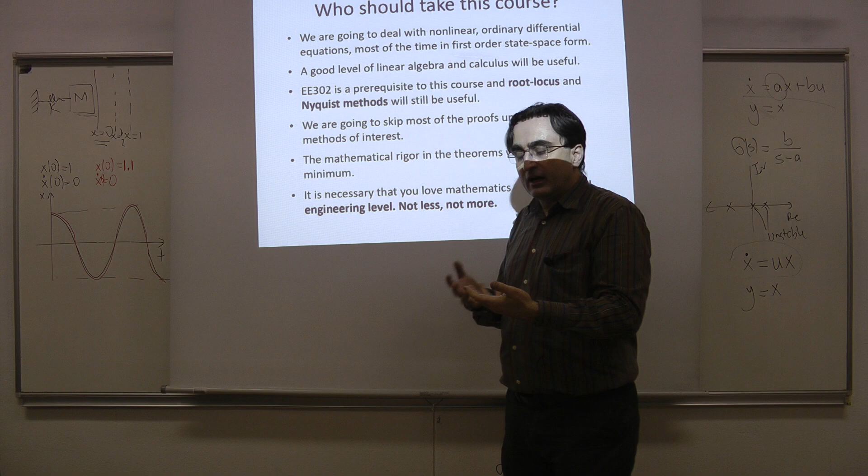We are going to be dealing with nonlinear ordinary differential equations most of the time in first-order state space form, and we'll use some level of linear algebra and calculus. Remember that EE302, the feedback control systems course in the 3rd year, is a prerequisite of this course, because we're going to use linear system tools when analyzing nonlinear control systems. We'll see that we can use root locus and Nyquist methods in analyzing some specific nonlinear systems. So knowing the topics in 302 might be useful for you.

I need to talk about the mathematics level here. We are in an engineering department, and I'd like to give this course as an engineering course to engineering students. So what I'm going to do is skip most of the proofs underlying the methods of interest. We'll see some theorems in this course, and I will never be able to prove them, because the proof would really require more advanced mathematics than what we engineers would know. So I'll skip the proofs, and I'll always keep the mathematical rigor in the theorems at a minimum. I will never use too advanced mathematics for engineering students in the conditions or proofs of the theorems.

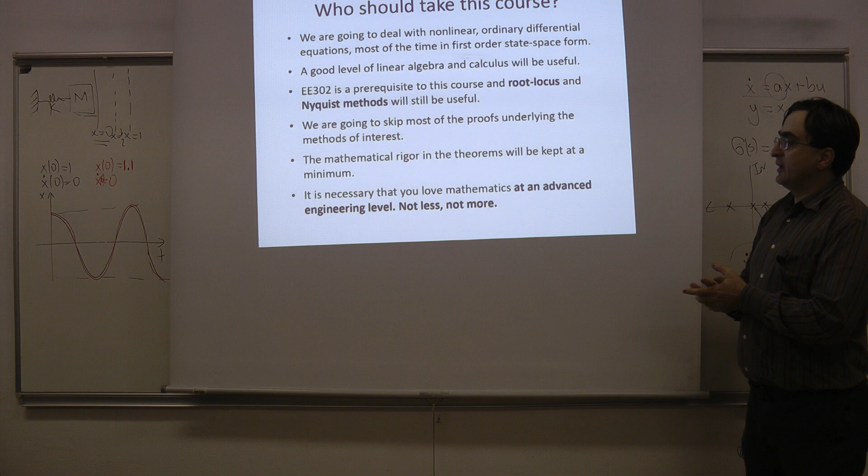This is because, first, we are in an engineering department, and second, you are undergraduate students. I really do not want to go into graduate level nonlinear control theory in this course. So I'll just try to give you the main ideas of nonlinear control without the most complete mathematical proofs. Last year I gave this course, and there were a couple of students with double majors in mathematics who were not really happy about this. At the end of the semester, in the evaluation forms, they said it was a waste of time.

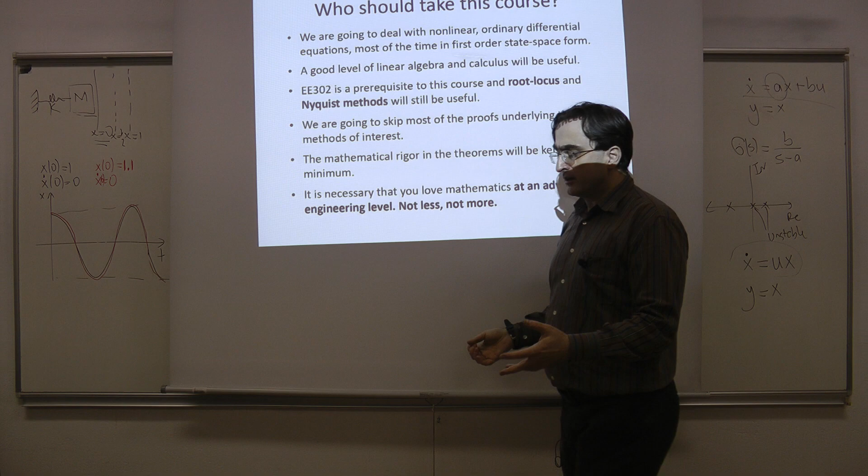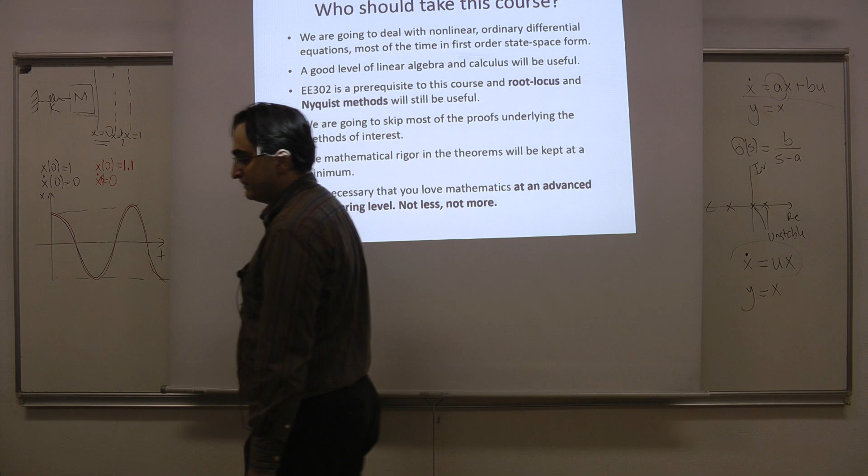I don't know, but this is the policy I'm going to follow, and therefore in this course it's necessary that you love mathematics at an advanced engineering level, not less, not more. If you want a nonlinear control course that proves everything and goes into deep mathematical ideas like they do in mathematics departments, I'm not going to be able to provide that for you. So if you have a double major in mathematics and expect me to give a course like we're in a graduate level or mathematics department, you'd be disappointed. Unfortunately, this is the case. If you like mathematics more than at an advanced engineering level, you might not be happy with this course.

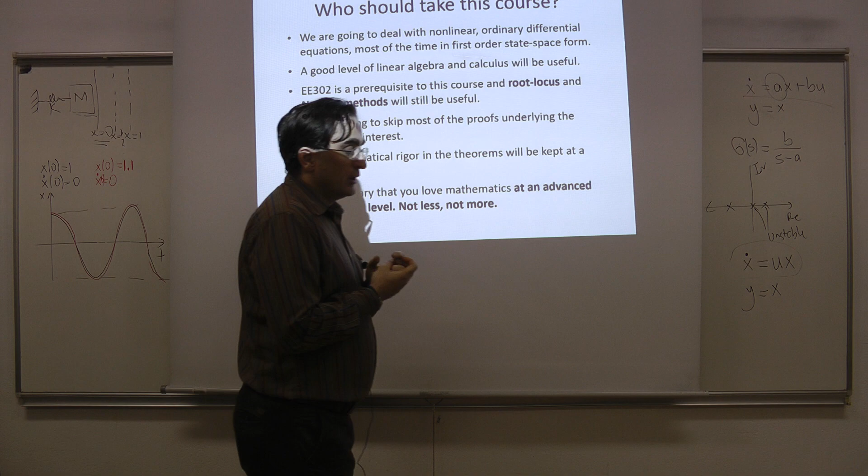So this was the introductory material I wanted to talk about. In the next lecture, I'm going to start on the board with definitions of nonlinear systems and important concepts about them. First we're going to learn about linearity, because nonlinearity doesn't mean anything if you don't know what a linear system is. You need to be able to identify a nonlinear system when you see it. So one of the first things we'll see is the definition of a linear system, then we'll learn about types of nonlinear systems, and we'll base all of the theory we see on these topics.